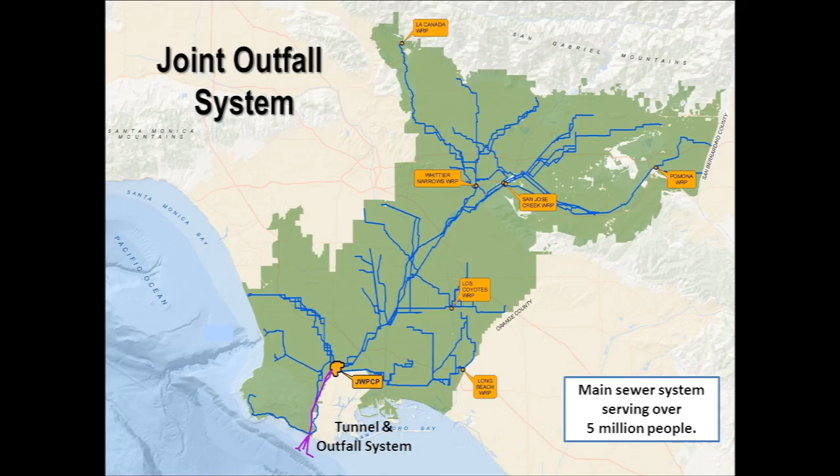Now, the plant in Carson depends upon 2 tunnels to take the treated water out to the ocean. These 2 tunnels, one 8 feet in diameter, the other 12, were built in the 1930s and 50s. So they are old. They're 60 and 80 years old. They weren't really built to current seismic standards, yet they cross 2 earthquake faults.

They also have a limited flow capacity, which really comes into play when it rains across the LA area. And that is because rainwater gets into the sewer system and the flows going into the Carson plant can more than double, which means the flows going through the tunnels can more than double as well.

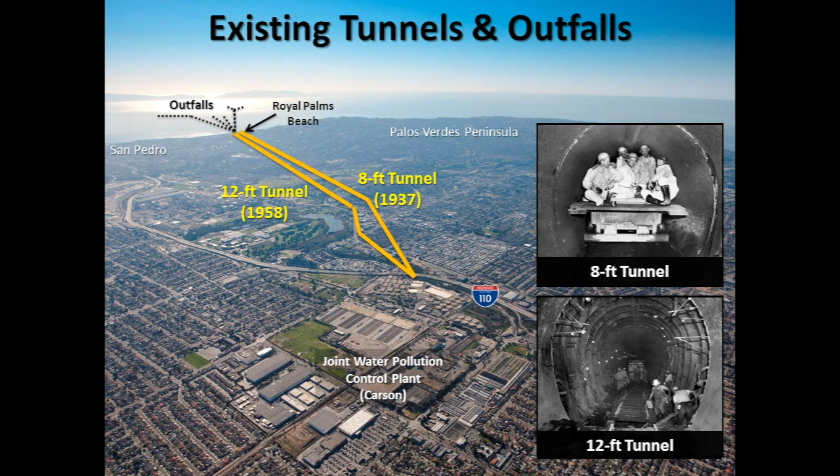And back in January of last year, 2017, there were major storms that came through the LA area, and the flows to the Carson plant more than doubled and almost overwhelmed the capacity of the tunnels, which meant that the water started backing up and almost flooded our plant.

So what would happen if the existing tunnels were to collapse because of an earthquake, or there's just way too much water for the tunnels to handle? Well, sewage would still flow into the Carson plant. So the treated water coming from the plant has to go somewhere, otherwise the plant will flood.

And we can't have that because it would knock out all the electrical equipment that's there, and it would take months, if not years, to restore to normal operations. So we would be basically in emergency mode. So what we would have to do is to allow treated or partially treated water to come out of the plant into the Wilmington drain and let it flow into Machado Lake.

Many of you know that a lot of money has been spent in restoring Machado Lake, making it into a precious resource. Well, under this emergency situation, this unauthorized, unpermitted discharge, that investment would be jeopardized.

But let's say that that measure was not enough. Maybe the Wilmington drain was full of stormwater already, or there's just too much flow going into the plant. Well, now we have more dire measures to consider. We can either let the sewage come out through the manholes and onto the streets, and of course, we wouldn't want that because that impacts public health.

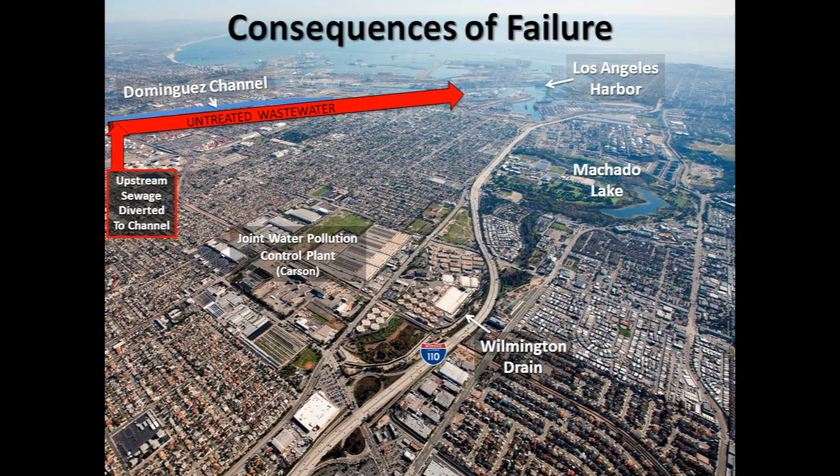Which is why we're building a new tunnel that will go from our plant in Carson all the way down to Royal Palms Beach, where we're going to connect the new tunnel to our existing ocean outfalls, shown here in the purple lines. Now, if you don't know what an outfall is, it's basically a pipe that goes at the bottom of the ocean outward, and at the end of the pipe are holes so that the treated water can just flow out into the ocean.

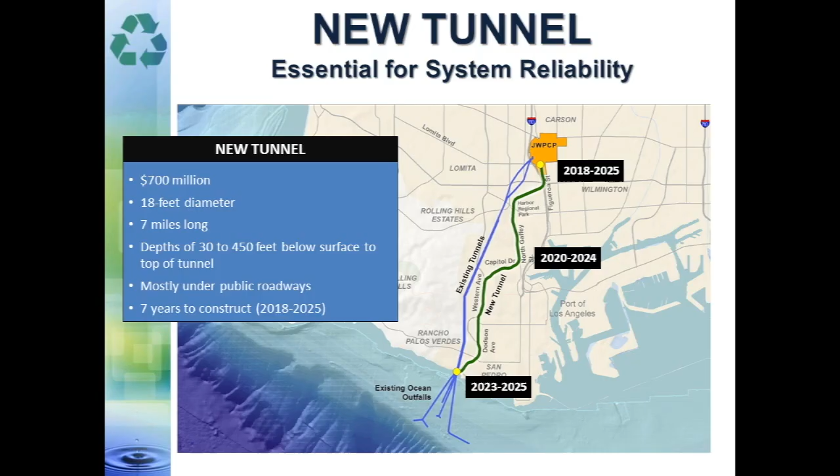So construction will begin later this year in Carson, and then 7 years later, it'll end at the beach. The new tunnel will be about 18 feet in inside diameter, enough to manage the stormwater flows. It'll be 7 miles long, and it'll cost about $700 million to construct. And of course, it'll be designed to current seismic standards.

But more importantly, the tunnel boring machine goes about 5 feet, it stops, and then the walls for the tunnel are put in. And then once that section of tunnel is put in, it goes another 5 feet, it stops, and then the next section of tunnel is put in. So the tunnel is built as you go, which means there is never empty space for the surrounding soil to go into. It's always reinforced, and it supports everything above it, all the way up to street level.

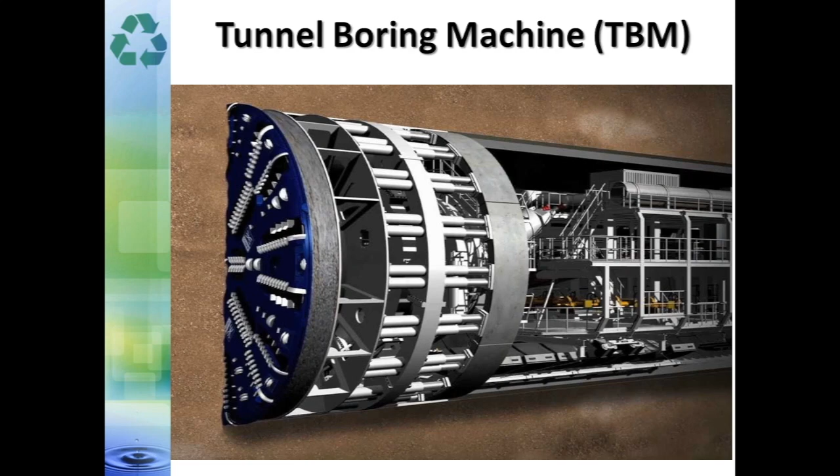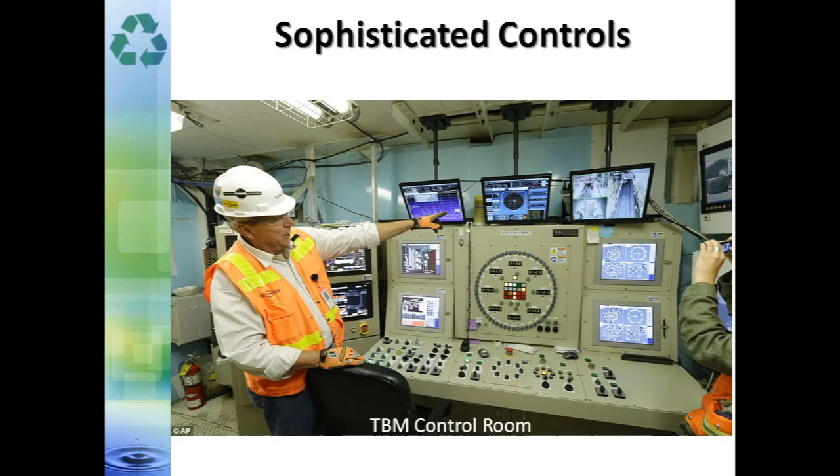If you were to go inside one of these tunnel boring machines into the control room, you would see that everything conceivable is being monitored, which makes it a very safe and controlled manner of tunneling. Even so, along the tunnel alignment, we're going to have 1,000 monitoring stations where we have sensors at street level to monitor for movement. We monitor the utility lines underneath the street, and we have sensors that go all the way down to the tunnel boring machine, kind of like an early warning system. And so with this comprehensive system, we protect the street above and the adjacent properties.

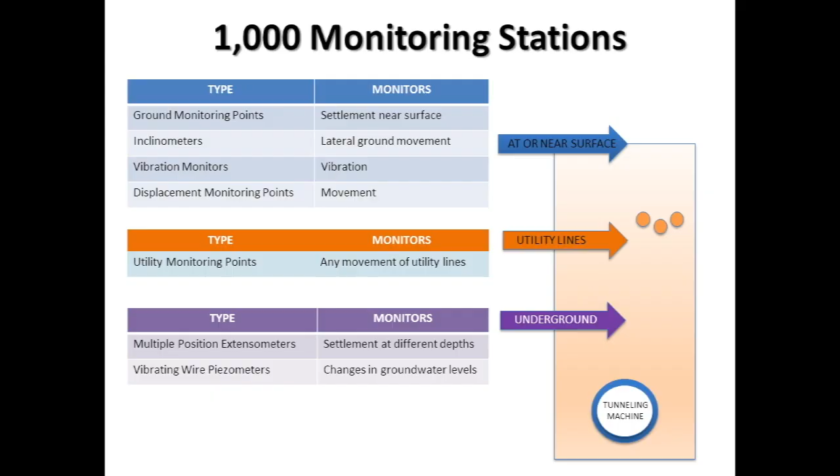As I alluded to earlier, construction is going to start at our facility in Carson. If you were to drive there and go to the corner of Lomita and Figueroa, you would see an empty lot, which is part of our facility. And in that lot, we're going to construct a shaft that's between 50 and 60 feet wide so that it can be used to lower the tunnel boring machine and then allow it, once it's lowered, to start the tunneling.

That shaft will also be used to remove all the excavated soil from construction, and it'll be used to actually lower the materials, the tunnel wall sections, for the construction of the tunnel itself.

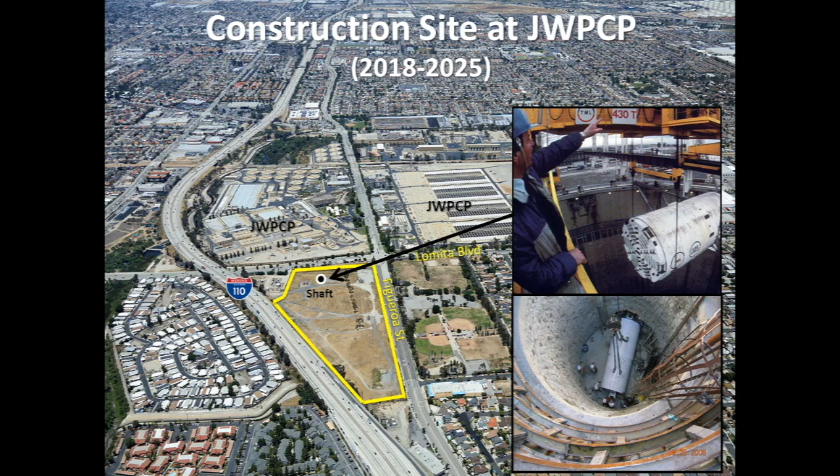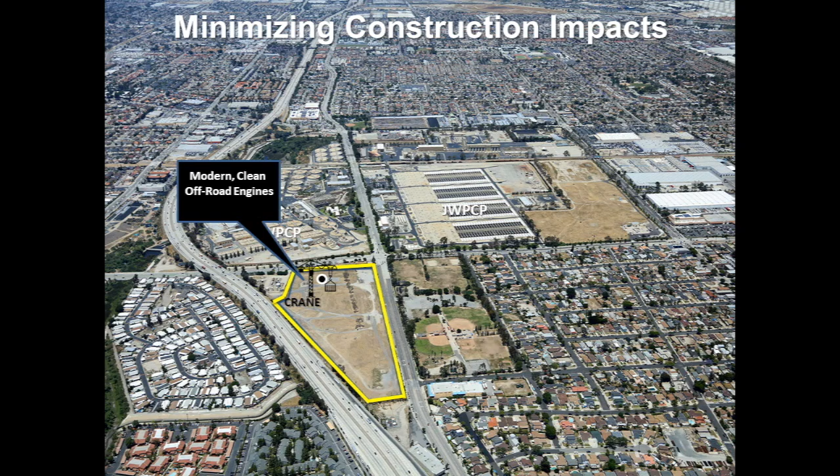Now, one of the things that we pride ourselves in is being good neighbors. We have done so since we were there decades ago, and we want to continue to do that during construction, which is why the tunnel boring machine itself will be electric. The on-site generators will be electric. And the equipment that requires engines will have modern, clean engines.

We're going to have a sound barrier to avoid sounds from impacting the surrounding neighborhoods. That barrier will also serve as a way so that you don't see the construction while it occurs. The trucks that haul away the dirt will also have clean, modern engines, and the trucks will be directed away from the homes.

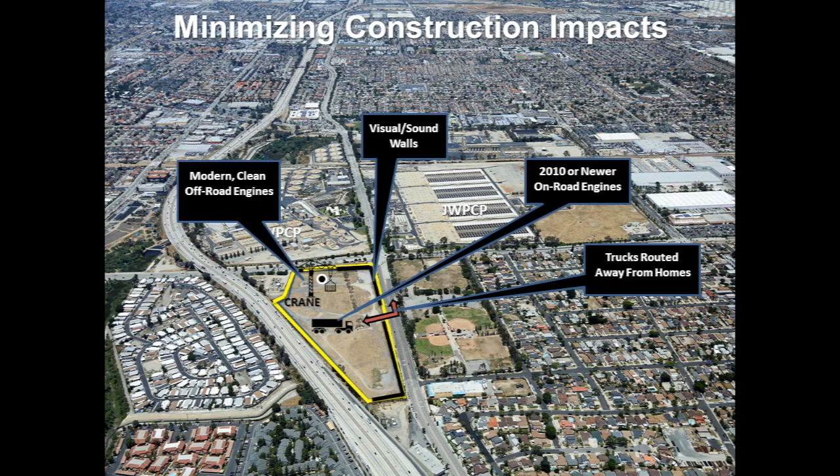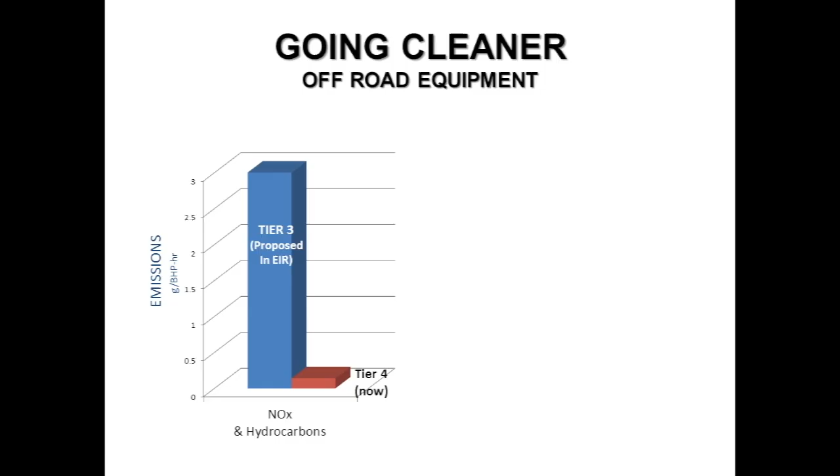So one of the things we committed to early in the planning process was to use clean engines. And the engines we committed to, EPA calls tier 3. But we're going to step it up. We're actually going to use tier 4, which is 86% cleaner with respect to the pollutant called NOx, and 90% cleaner with respect to particulate matter. Our mission is to protect public health, your health, and that's exactly what we're doing.

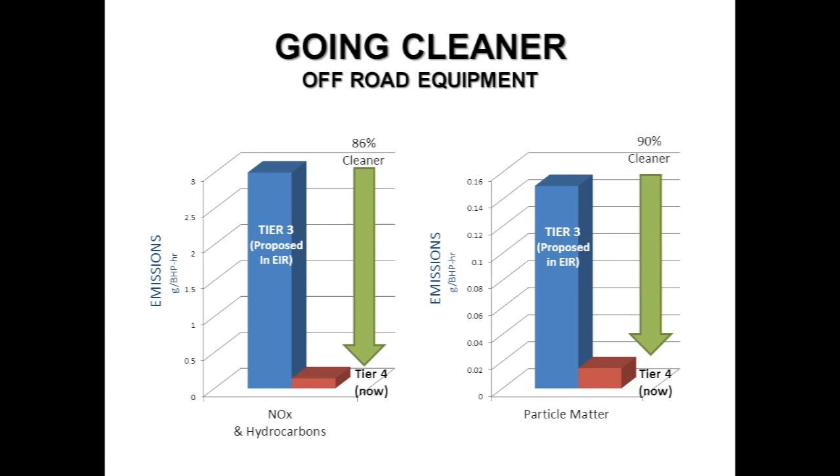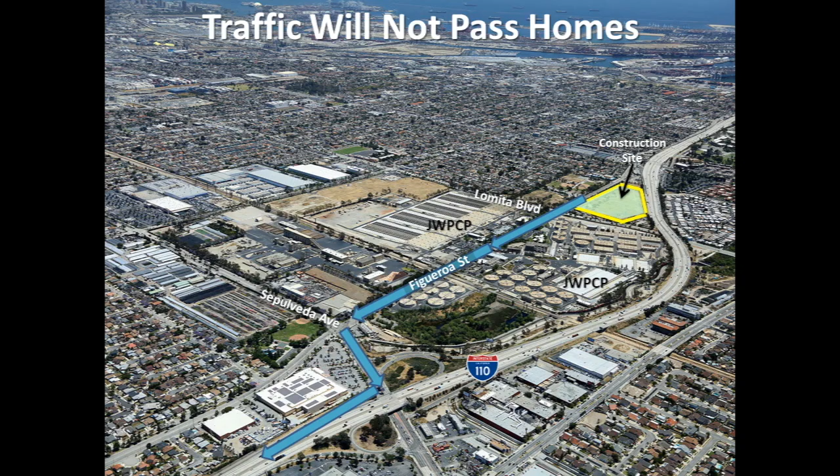As I mentioned, the traffic will not pass by homes. Instead, once the trucks leave the site, they'll take a left turn on Figueroa, go to Sepulveda, make a left, and get right on the freeway. Now you're probably wondering, well, how much truck traffic are we talking about? Well, if you compare it to existing traffic on Sepulveda, you're talking about an increase of 1 to 2%.

But notwithstanding, we're going to work with the city of Carson in developing a traffic plan. We're also going to look, in conjunction with the city, to see if any improvements can be made at the traffic light there. Additionally, we're going to try to avoid peak hours for traffic.

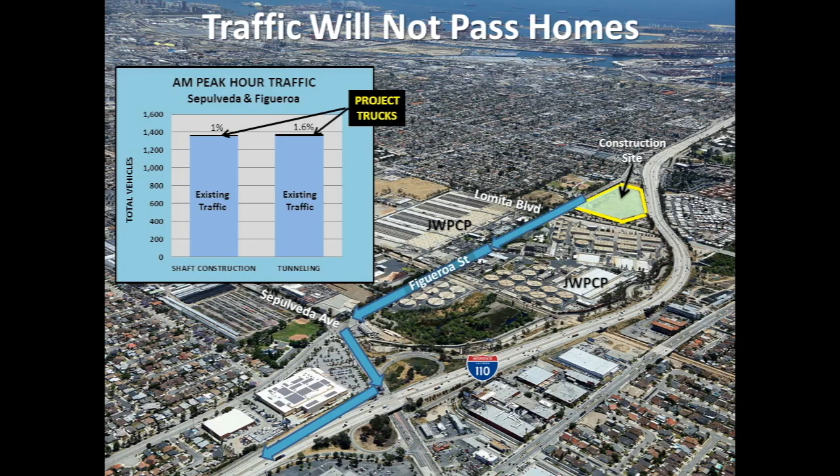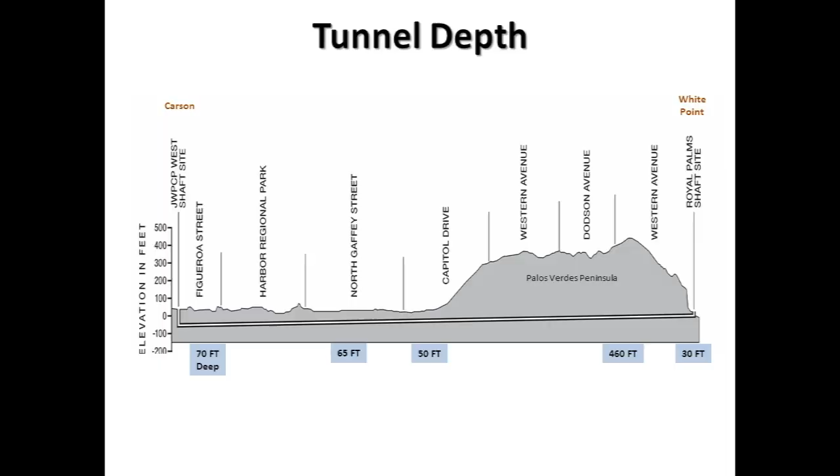So once the tunnel boring machine is in the ground, tunneling will be invisible until it daylights at the beach 7 miles later. It'll start about 70 feet below the surface, and then once it gets into the Palos Verdes Peninsula, it'll be about 460 feet below the surface. And just before the tunnel boring machine reaches the beach, we will have a small shaft constructed so that we can remove the machine and so that we can start the work of tying in the new tunnel with the existing ocean outfalls.

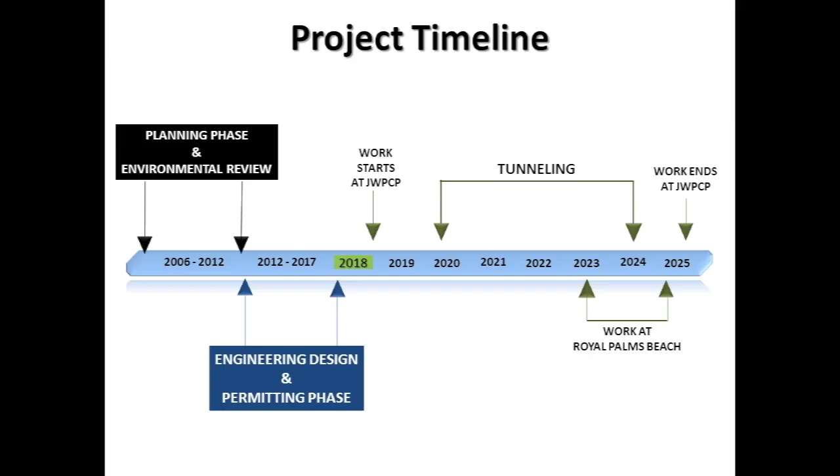Now, we want to continue to be good neighbors during the construction, and part of that is to keep you informed of the events of construction, giving you information. And so we have a Facebook page, we have a dedicated website, and also if you have questions or concerns, you can either email us or you can call us. Because our goal is to be your advocate, to hear from you of concerns or questions so that we can answer those. And we plan on being there for the next 7 years. And so we want to be your partners in this infrastructure project.